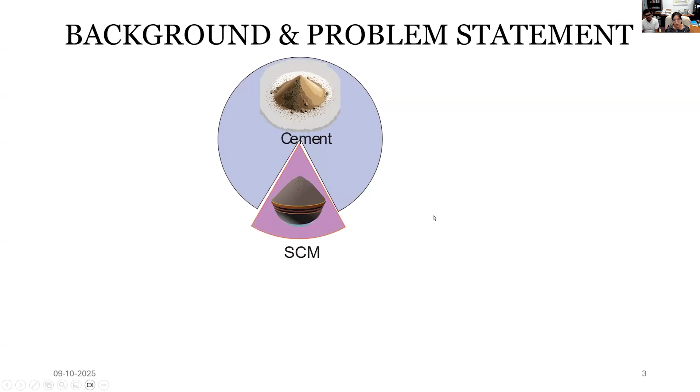So there are a lot of ongoing researches to find out how to minimize the CO2 release from the cement industry. One option can be to reformulate the clinker phases that we use to produce cement. Or we can also use a different type of binder, such as LC3, that has been quite a hot topic recently. But typically, what we do in the cement industry is to partially replace cement with so-called SCM, supplementary cementitious materials. There are several SCMs that are typically used on the job site. Fly ash and slag are the most commonly used.

However, fly ash is a byproduct of coal combustion power plants, and due to the closing of these plants, the fly ash supply now goes down dramatically. Slag, on the other side, is a byproduct of the iron industry, and since we are switching from the blast furnace to the electric furnace, the supply for slag also drops. However, the demand for both materials goes up due to the sustainability issue. So therefore, a lot of people are doing research to seek other options that can be used as SCM.

In recent years, there are a lot of ongoing researches to see how to use agricultural waste as supplementary cementitious materials. Maybe you have heard of research on rice husk ash quite a bit. Rice, for example, belongs to the so-called Poaceae family of the plant kingdom. This type of crop has a high amorphous silica content, which makes it a good candidate to be used as SCM. Typical plants or crops under this family are corn, rice, wheat, bamboo, and sugarcane.

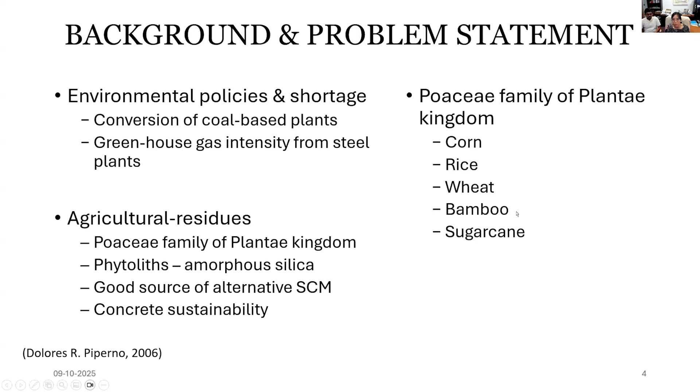So if we take a look at the distribution or production of these crops all over the world, we can find that in India and China, and also Indonesia and some other Asian countries, they have rice husk a lot. They produce rice a lot. That's why rice husk is more available there.

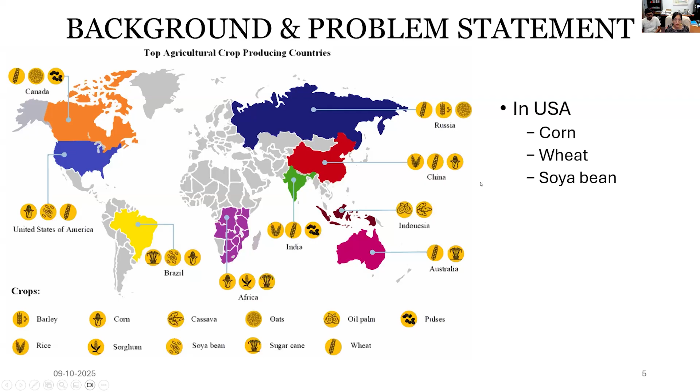However, in the US, what we produce are corn, wheat and soybeans. Those are the top three agricultural crops produced in the US. And here, corn and wheat belong to the family that we mentioned, which has a high content of silica in it. Now in the US, if we take a look at how much corn stover we produce each year, it's over 200 million tons. And for wheat, it's about 45 million tons each year.

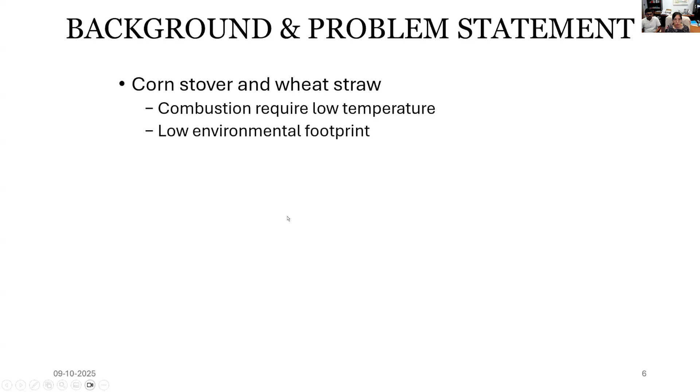If we just think about these two products and combust them to make so-called ash that can be used in cement, even though that will also cost some energy, the temperature that you use to combust corn stover ash and wheat straw ash is way lower than the temperature that you use to make cement. That makes a low environmental footprint for CO2 released to the air.

If we just consume like 50% of the corn stover and or the wheat straw that we produce in the US each year, that can help to cut off 9.5% of cement production, which means 7 million metric tons of CO2 will be reduced compared to traditional cement manufacturing.

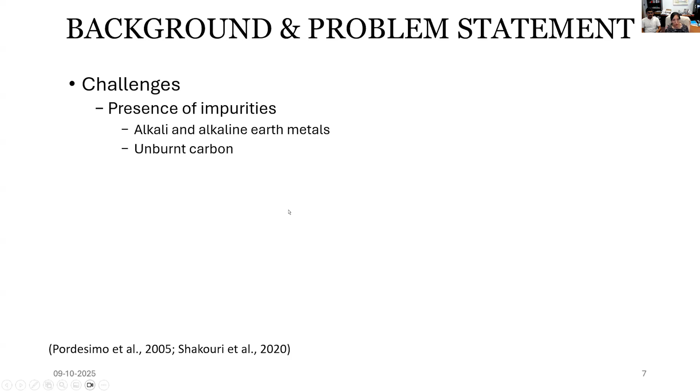However, these agricultural ashes cannot be directly used in cement. This is due to the impurities in these materials. They typically have very high alkali and alkaline earth metals that inhibit hydration of cement. And also there might be a lot of unburned carbon in it that increases the loss on ignition in cement. Therefore, if you want to use these ashes as cementitious materials, most of the time you will need to do so-called pre-treatment.

There are three typical ways that you can pre-treat your material. You can do it chemically, which means we can use acid or basic solutions to remove the impurities. Or you can use thermal treatment, which means you heat your sample to a high temperature so that the impurities are gotten rid of. And you can also grind your samples, which is called mechanochemical reactions. While you're grinding, you generate heat, which also helps to remove the impurities in your material.

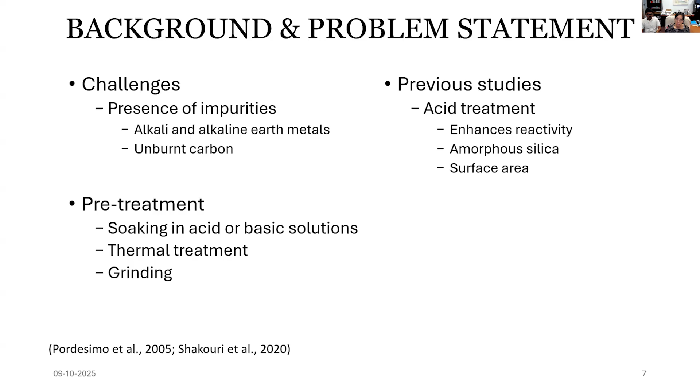So for ash treatment, chemical treatment will be the most feasible way, because researchers found that acid treatment can help to remove the impurities quite efficiently, and it also helps to increase the amorphous silica content in your material.

However, there are a lot of uncertainties in acid treatment. Currently in the US, there's no standard procedure we can follow to treat our agricultural waste using different types of acid. There's nothing that says we need to use a certain concentration, so we need to figure it out. The treatment duration is another question, and the temperature, the concentration of the acid, and the ash to acid ratio. These are all undetermined. Therefore, to decipher this black box of acid treatment, we need to conduct some systematic research.

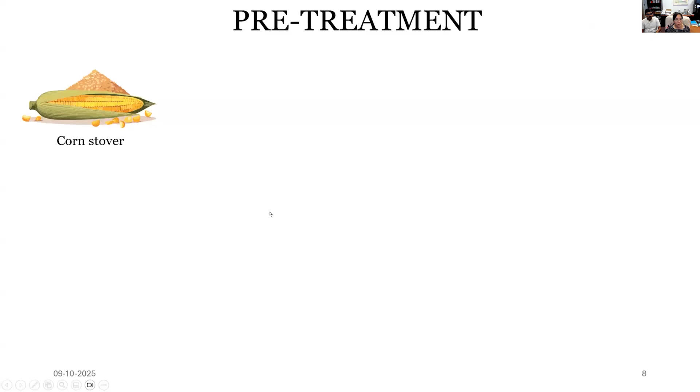So in our group, we nailed down our methodologies. Once we have the corn stover, we initially burn it at a low temperature to make ash. Once we have the ash, we grind it into powders, and we let all of the powders go through number 200 sieves so that they have comparable size to cement. Then we use water wash or acid wash for the material. The water wash we use as a reference, and we study the impurities in the leachates.

For the acid wash, we decided to use 3 different types of acid: HCl, hydrochloric acid, nitric acid, and sulfuric acid. For each acid, we have 3 concentrations: 0.1, 0.5, and 1 mole per liter. And we also have 3 acid to ash ratios, which are 2.5, 5, and 10.

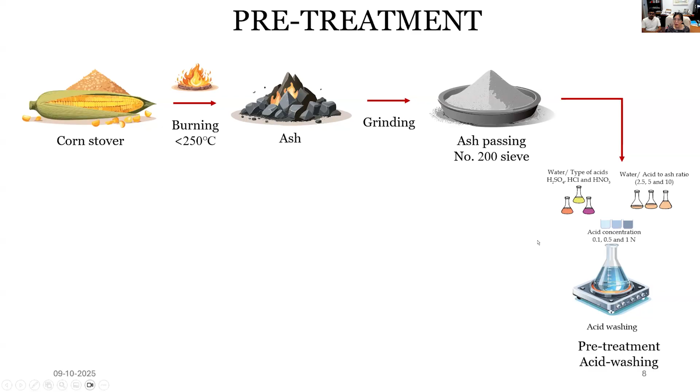After that, we wash the ash and filter it. The solid residual we wash again with water to get rid of the acid residue, then we dry it and calcine the solid. For the liquid, we analyze its composition to see the removal efficiency for the impurities. After we have the calcined ash, we mix it together with cement to look at the hydration.

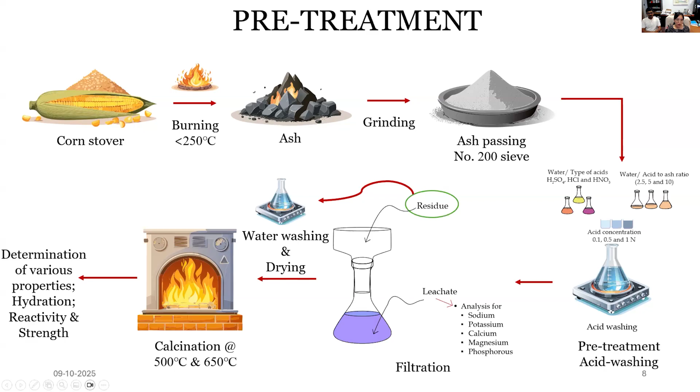So here are the materials that we used in our research. We have type 1L cement. We have fly ash as another reference to compare with the corn stover ash that we developed. And every time when we replace the cement with ash, we always use 20%, which is consistent with the current practice of KYTC.

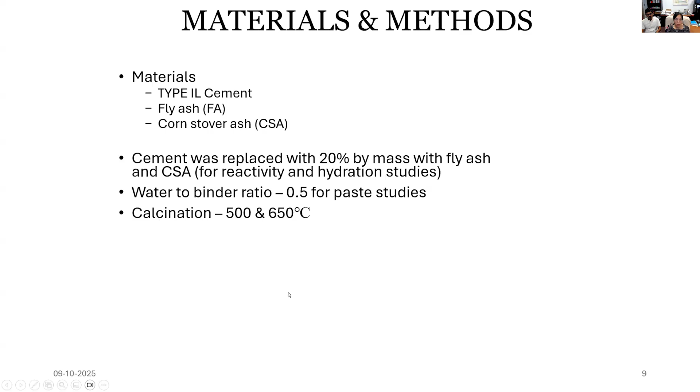And then we used 0.5 for water to binder ratio for all of the paste that we did, and 2 different calcination temperatures. For the material characterizations, we used XRF, and we also test loss on ignition. And we used the ICP-MS method to look at the leachate, and then we will show the results.

And we also use the TGA method to look at the composition in the paste so that we can calculate the CH amount, and then we can use that as an indication of the secondary hydration or pozzolanic reaction in paste. And then we also use the calorimetric method to measure the hydration of the paste directly.

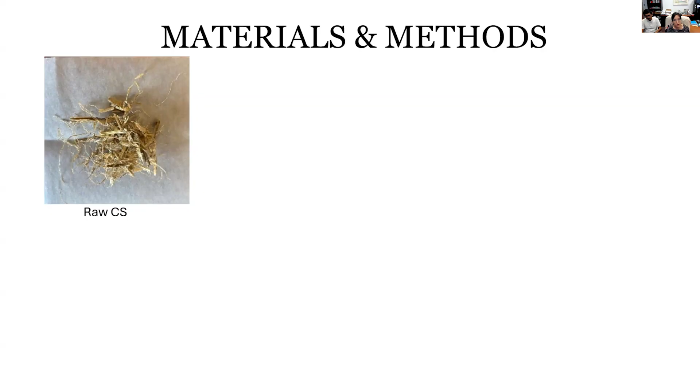So here are some pictures that we took in the process of the experiments. And these are the raw corn stover that we obtained from Idaho National Lab. And then after that, we burn it at low temperature, and you will see those blackish color ash. And then we grind them and we sieve them. So they all pass through number 200 sieves. And those are the fine powders.

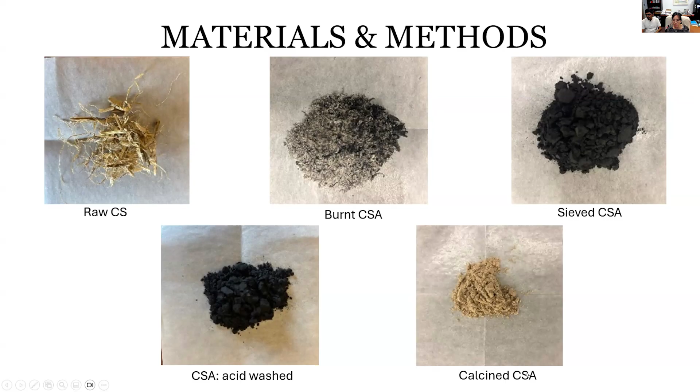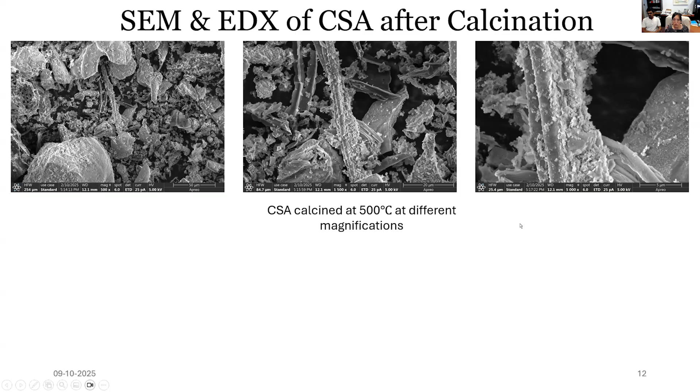So if we take a look at the ash calcined at 500 degrees from just water wash, you can still see the fiber structures of your material. And then if we enlarge, for this picture on your right, you actually see a lot of deposits on the surface of your material. So if we enlarge into that area and also do the EDS, we found that lots of these deposits are actually silica.

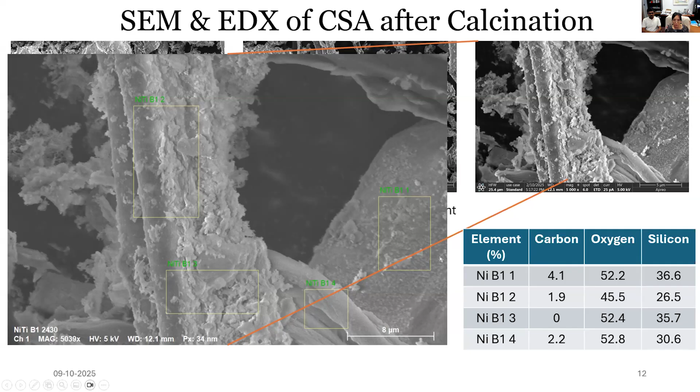Which gave us an important message: these materials actually have a great potential to be used as an SCM if they're treated properly. So from there, we thought after water wash and calcine, we already see silica in it. And so our next goal is to remove the impurities through acid treatment.

So as I mentioned, we have 3 different types of acid. We have 3 different concentrations, and we have 3 different acid to ash ratios. But we want to keep the consistency in all of the procedures that we use for all different types of acid and all these variables. So first thing we need to decide is how long we've got to wash these ashes so that the impurities can be removed effectively.

So we did an initial study. We used HCl as the acid and low concentration there. And we washed our ash for 2 hours, 4 hours, and 6 hours. And after that, we analyzed the composition in the leachate by using this ICP method. So ICP is inductively coupled plasma.

It's a method that helps you identify and quantify the elements in the sample. How it did it is by converting the samples into ions, and then these ions can be separated by mass to charge ratios using a mass spectrometer.

Next, coming to the effect of different types of acid. Here we can see for all the corn stover ashes, we washed the acid corn stover ash with hydrochloric acid, sulfuric acid, and nitric acid at 1 normality at similar acid to ash ratio. So here we can understand that acid becomes very selective in removing particular impurities from the system.

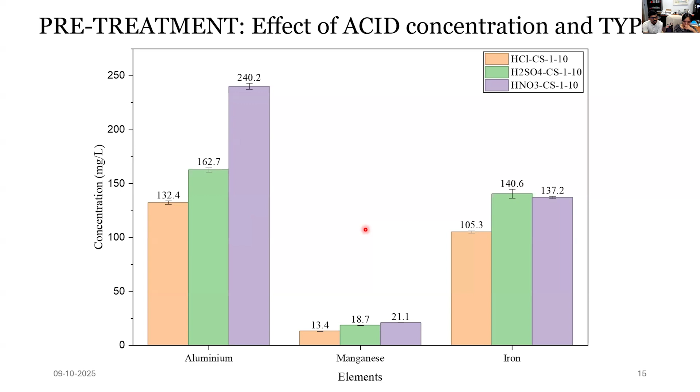So based on this, we used the treated material, calcined this material, and substituted it with cement to try to understand how the different treatments affect the reactivity and the hydration. In the next slide, I will be speaking about the effect of replacement of this treated material on the hydration. For the hydration method, we used isothermal calorimetry to measure the heat release from the system.

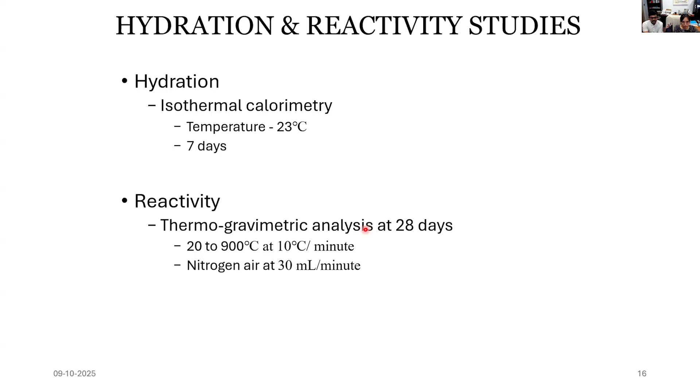This particular experiment was conducted for 7 days at a constant temperature of 23 degrees centigrade. To understand the reactivity, we used thermogravimetric analysis, and these samples, the cement and the 20% replaced corn stover ash samples, were cast and kept for 28 days, and the following method was used to understand the presence of CH in the system, calcium hydroxide.

Coming to the hydration studies, in this slide we will see how the effect of calcination affects the heat release from the cement. We can understand that with respect to OPC, when we replace cement with 20% fly ash, obviously fly ash reactivity is a bit slower, and it also dilutes the system, which leads to a reduction in the heat flow.

And when we replace cement with corn stover ash calcined at 500 degrees centigrade, we could see that the presence of impurity is not released, not taken out completely, which leads to a higher dormant period compared to the fly ash, and also a reduction in the heat flow. However, when we replace the cement with corn stover ash calcined at 650 degrees centigrade without any pre-treatment, we could see a very huge increase in the heat flow, which shows that the reactivity is boosting high, and the dormant period gets reduced.

Coming to the next point, this could be because of two reasons. One is the corn stover ash, which is calcined at 500 degrees centigrade, had a higher amount of unburned carbon in the system, almost 5.4%. When we calcine it to 650 degrees centigrade, the unburned carbon reduced to 1.8%, which correspondingly increases the reactive silica and alumina in the system.

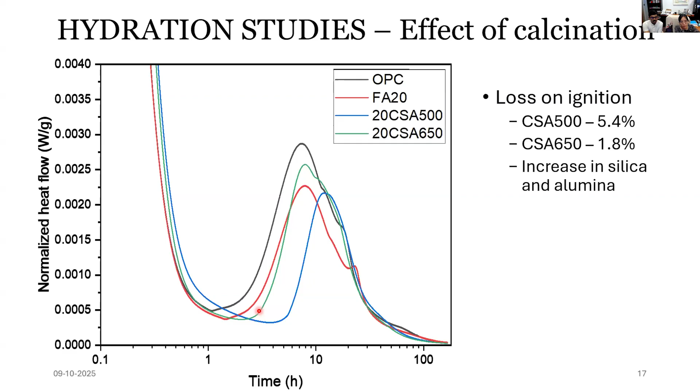When it comes to using the calcined ashes at 650 degrees centigrade, we could see that the pattern is almost similar when treated with different kinds of acids like hydrochloric acid, sulfuric acid, and nitric acid.

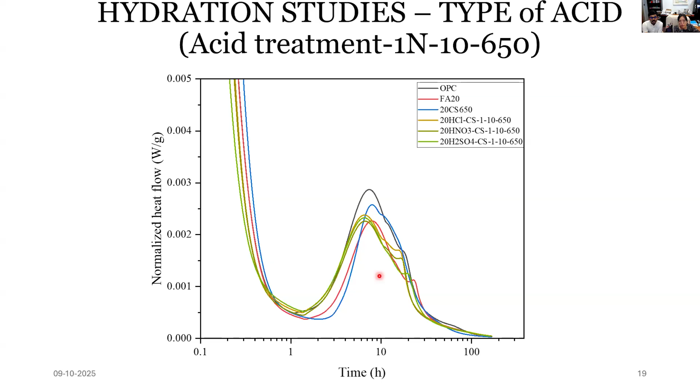Then we went on to understand the reactivity of these different systems. For that, we used thermogravimetric analysis as mentioned earlier. In this method, we try to quantify the amount of calcium hydroxide in the system. The calcium hydroxide is formed during the primary reaction between cement and water, which leads to formation of the primary binding product called calcium silicate hydrate, along with calcium hydroxide.

When we start substituting the cement with supplementary cementitious material like fly ash or the treated ashes, based on the amount of silica in the system, it can react with this formed calcium hydroxide and turn it into secondary CSH. So measuring the amount of CH in the system can be indirectly used to know the reactivity, or the CH balance, in the system, which tells us about the reactivity of the system. Lower the calcium hydroxide in the system, the higher the reactivity.

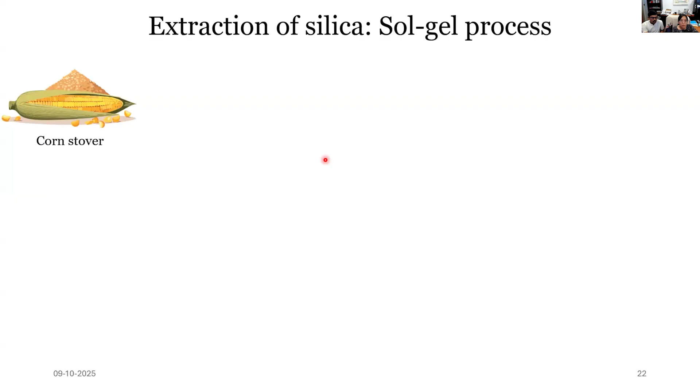Other than this, we actually extracted the purest form of silica from the agro residue. For that, using the pre-treatment method shown earlier, we burnt the corn stover under 250 degrees centigrade, ground the ash obtained, and passed it through number 200 sieve. Then we used 0.1 normality hydrochloric acid, which gave the best reactivity in terms of CH consumption.

And after washing it, the residue what we obtained, we water washed and dried it and calcined at 650 degrees centigrade. And then this material, what we prepared from the hydrochloric acid treatment, we used the sol gel method to separate out the purest silica from the system.

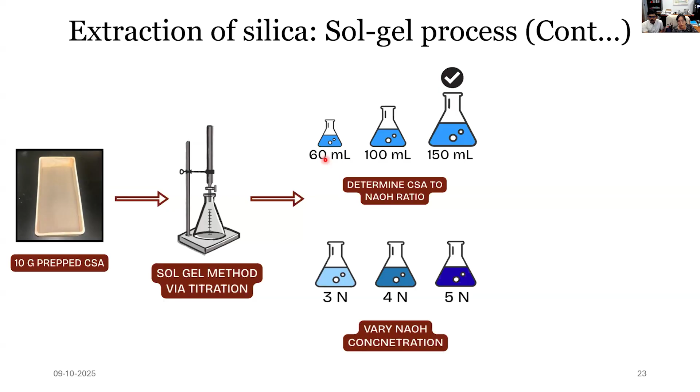And we used two different types of process parameters to optimize it. One is we varied the CSA to sodium hydroxide volume from 60 ml to 150 ml. And then the normality of the sodium hydroxide also varied from 3 normality to 5 normality to identify which could be the optimum value to synthesize this amorphous silica from the system.

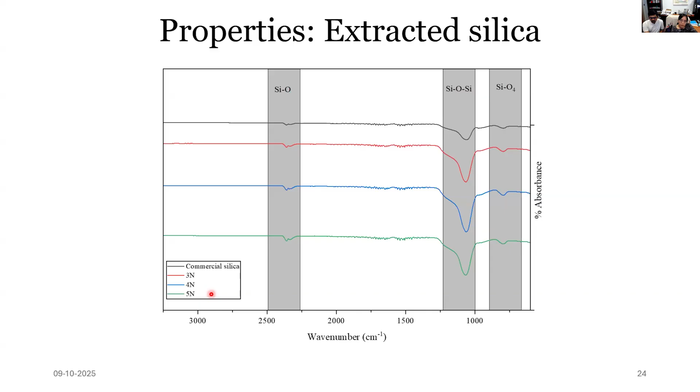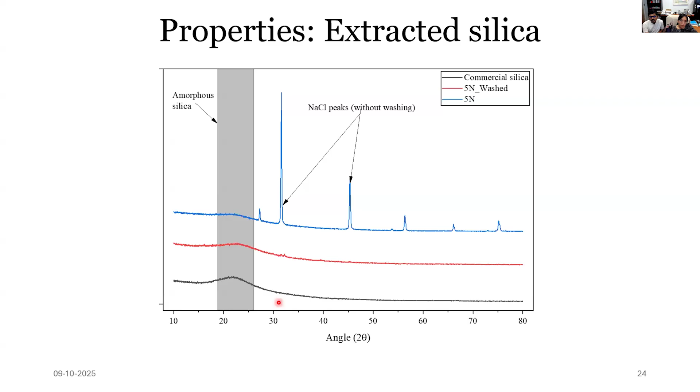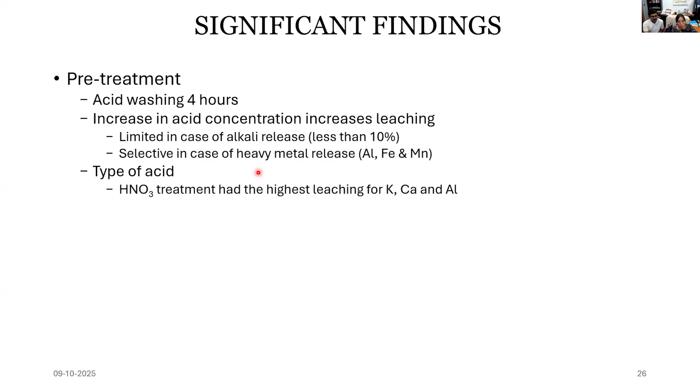And coming to the hydration reactivity studies, we could understand that calcination obviously improves the reactivity by reducing the loss on ignition of the system and increasing the amorphous silica and alumina in the system.

And when it comes to specific type of acid treatment, if we are going to pre-treat the ash with sulfuric acid, we need to be very conscious because treatment with sulfuric acid leads to a higher amount of sulfate in the corn stover ash what we have. That might result in formation of ettringite at a later stage, which we can observe from the hydration peaks. This might lead to some kind of hardened related property problems in the later stages.

And when it comes to TGA reactivity results, we could clearly see that if we have an acid which has a good efficiency in removing the impurities from the system, that doesn't mean it has the highest reactivity. So to understand this in a better way, we are doing further material property related characterization research to understand how this affects the reactivity.

And coming to the results, the significant findings on the extracted silica: we could use a very simplified method to extract pure amorphous silica from the system by the sol-gel process. Especially, if we increase the concentration of the sodium hydroxide, then the yield of the silica which we are extracting from the agro residue increases.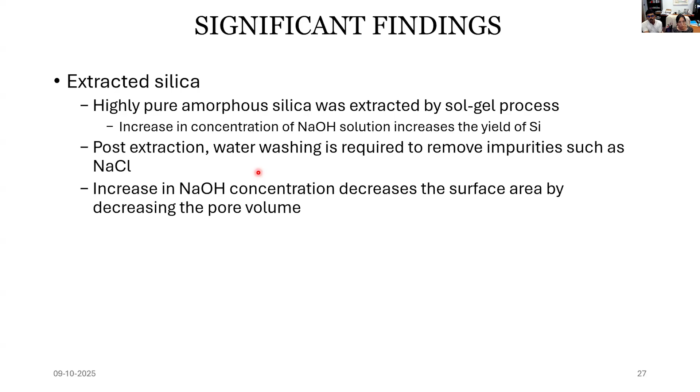To have a more comprehensive understanding about how different characteristics and properties affect the reactivity and hydration, we are actually in the process of conducting and evaluating different characteristics of the material what we have obtained by the acid washing. And also fresh and hardened property studies are being carried out to relate it with the reactivity of the system.

And as we know, we say that these agro residues can be used as a supplementary cementitious material. However, we need to do some kind of pre-treatments and calcination to make them more appropriate or reactive when we are using them as a substitute. So in order to know whether it is economical and not degrading the environment, we are doing a life cycle analysis on this material to evaluate the optimum pre-treatment process and calcination condition we can give to the material.

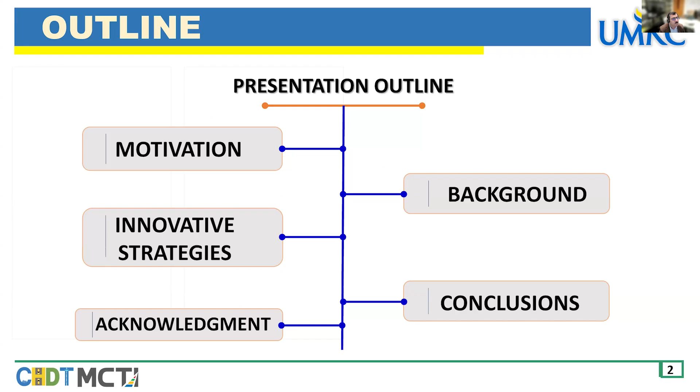My presentation is titled Embracing Innovative Strategies for Sustainable and Resilient Bridges. The presentation outline includes the motivation, the background, innovative strategies, conclusions, and finally the acknowledgement. So I'm going to start by defining these two important terms, but in a different way. Sustainability ensures long-term function through infrastructure rehabilitation, and resilience enables the system to adapt and recover.

Now, the question is, how do sustainability and resilience complement each other in ensuring the long-term functionality and adaptability of an infrastructure system? So there is a huge challenge so far. According to the U.S. Bridge Conditions 2024, from the Federal Highway Administration, between the years 20 and 24 there is almost a 4% increase in the number of bridges in fair condition. And the good condition has decreased.

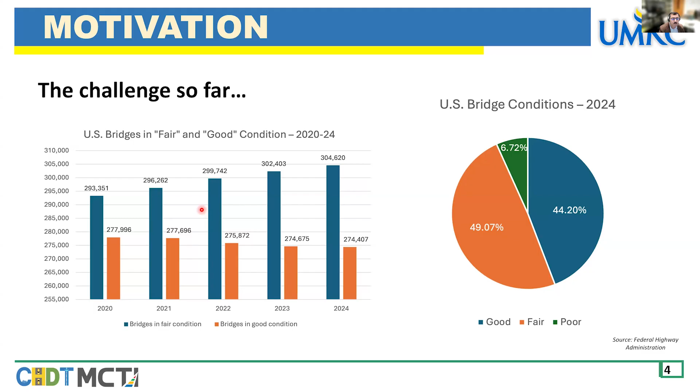And as we can see here, if we add up the fair and the poor condition, it's almost 56% of the total number of bridges, which is almost 622,000 bridges in the whole nation. So this is something really alarming. And we're still with the challenge so far.

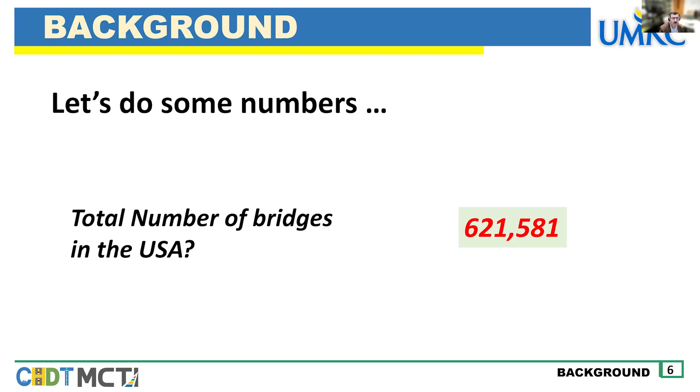So let's do some numbers here. The total number of bridges in the United States is almost 622,000. These bridges can be classified in these 3 categories: steel bridges 33%, conventional reinforced concrete bridges 42%, and prestressed concrete 25%. So mainly it's steel and concrete here.

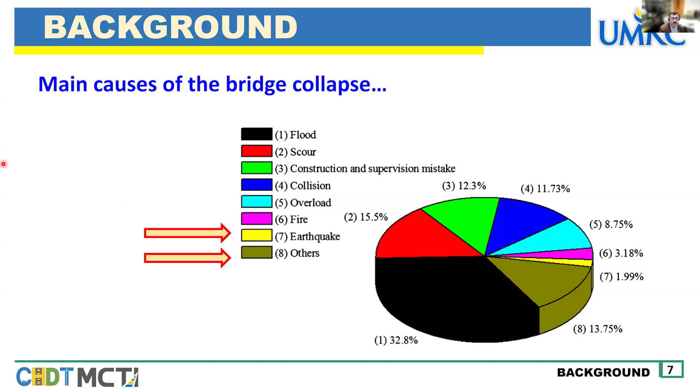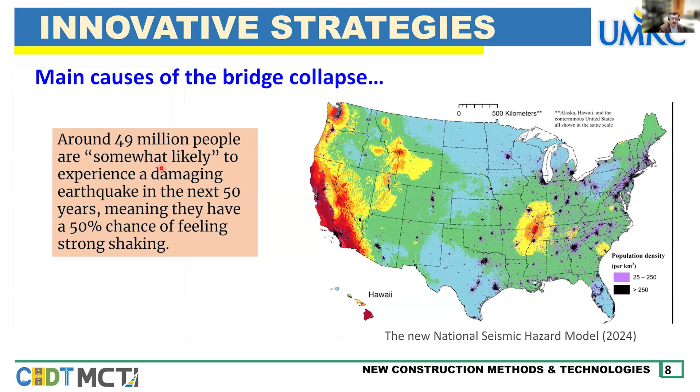Now, the main causes of bridge collapse, as we can see, is a huge list, starting with flooding and ending with earthquake. We are going to focus today on two things here: the earthquake and, among the others, mainly corrosion for the steel bridges. As we can see, the National Seismic Hazard Model 2024 estimated that around 49 million people are likely to experience a damaging earthquake in the next 50 years. So the question is how to mitigate earthquake damage for our modern infrastructure systems and also the bridge elements.

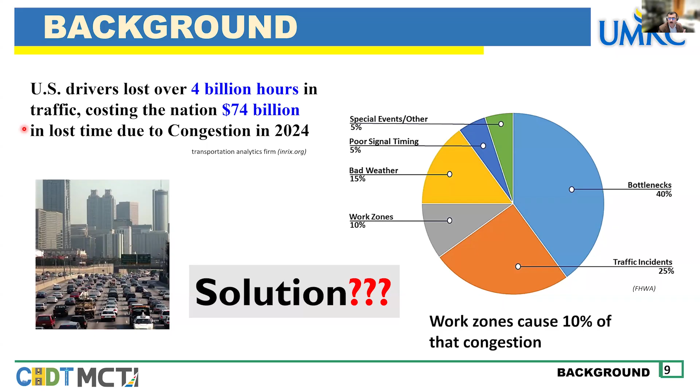So as we can see here, there is the seismic hazard and also the congestion. So we need to ask ourselves, what's the solution here? What's required to surmount these significant challenges? What we need, honestly, is innovation. Innovation in what? In new construction methods and technologies, advanced materials for rehabilitation, and finally, evaluation techniques. So let's start with the new construction methods and technologies.

So ABC, accelerated bridge construction, relies mainly on prefabricated bridge elements and systems. One of the indispensable elements in this assembly is the columns, and ABC represents a paradigm shift in bridge construction for today's infrastructure and modern nationwide systems.

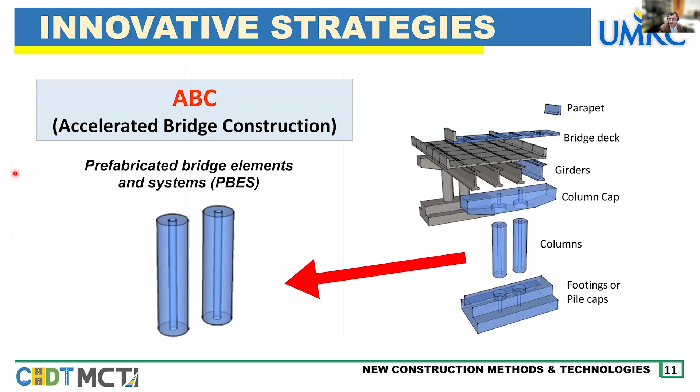So what's the advantage of ABC, accelerated bridge construction? First of all, site constructability, reducing the total project delivery time, work zone safety by reducing the exposure of workers in hazard zones, and the traffic impact, and also the on-site construction time, which is related to the total project time, and the weather-related time. It's going to decrease the traffic impact, the on-site construction time, the weather-related time, and mainly increase the safety in the work zone.

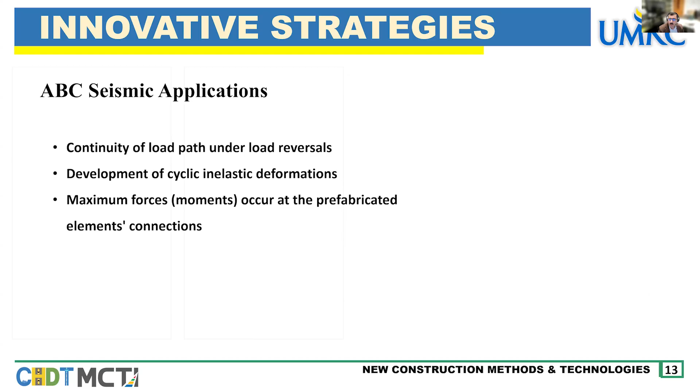For ABC seismic applications, we want from accelerated bridge construction the continuity of the load path under load reversals. In seismic events, with development of cyclic inelastic deformations, maximum forces and moments occur at the prefabricated member connections. This is very important. So the connections, either with the bent, which is the pocket connection, or with the footing, the socket connection, and certain element material behaviors may cause rapid loss of the cyclic resistance, due to local buckling and strain concentration.

So in general, we need to reduce the seismic mass, make efficient use of materials, and improve the strength-to-mass and stiffness-to-mass ratio. I think we are asking too much here. Can we achieve all these aspects? So let's see. We propose the hollow core column.

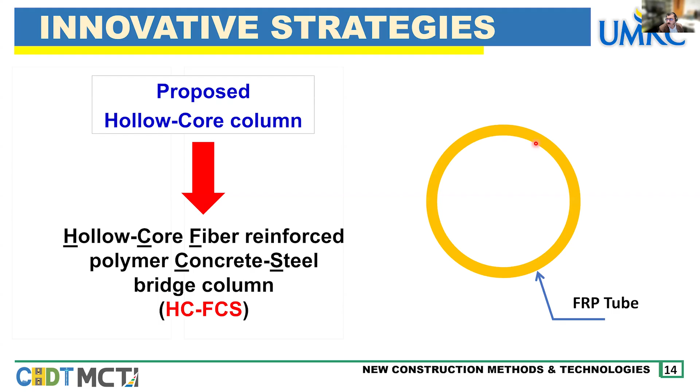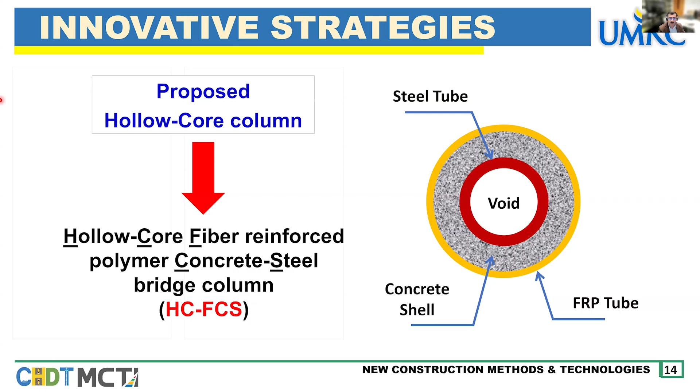It's an innovative column, the hollow core fiber reinforced polymer concrete steel bridge column. It consists of the FRP tube outside, the hollow steel tube inside, and the concrete sandwiched between them. There is no reinforcement, just the concrete, acting like a spring between the steel tube inside and the FRP tube outside. What are the advantages of this kind of novel column?

60 to 75% less concrete material and lower freight cost. The FRP tube acts as stay-in-place formwork, as we can see here, with the steel column and the concrete placed between them, and we use self-consolidating concrete, SCC. The steel tube acts as flexural and shear reinforcement, as you can see here. And finally, high corrosion resistance due to the FRP tube outside.

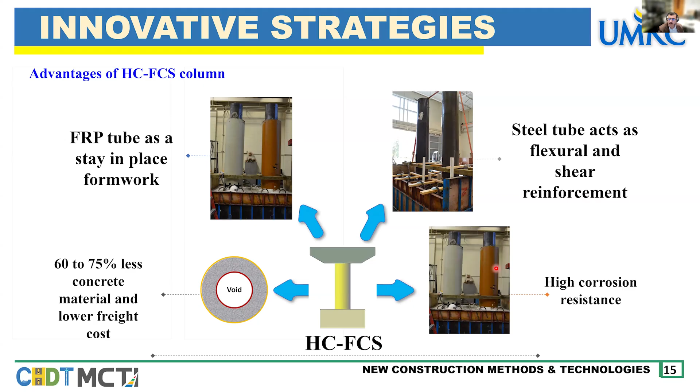The construction method of the hollow core fiber concrete steel column consists of cast-in-place elements, as we have seen in the previous picture, or it's going to be a prefabricated, precast element, consisting of the footing with the hole, and then just bring the column inside, as we can see here, and then do the injection of high strength grout around the embedded steel tube inside the footing.

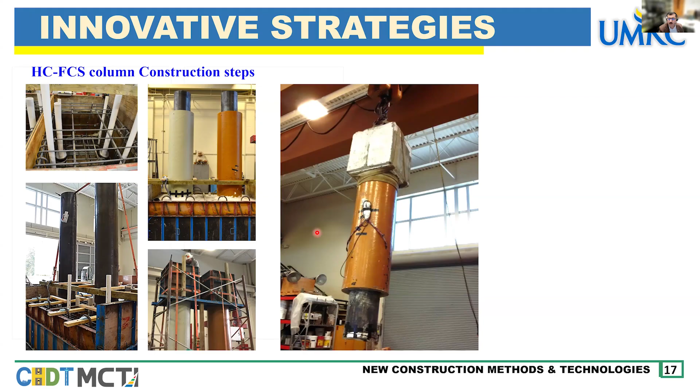And here is a picture from the construction of the larger scale hollow core fiber concrete steel column. This is the caging for the footing, and this is placing the steel tube inside the footing, and then the FRP tube outside, we have two types of glass fiber tubes, and then constructing the head, mimicking the bent of the column. After this, lifting the column, with the embedded steel tube portion going into the footing. We make some adjustment inside the footing, do the high strength grout, and the column, as we can see here, is ready to be tested as a large scale column.

So in high seismic areas, inelastic ductility is required. This is the ductile design, which is applied with the displacement based method. This is different from the traditional design, which uses the AASHTO coefficient method. In general, I need the capacity higher than the demand. This is the main concept.

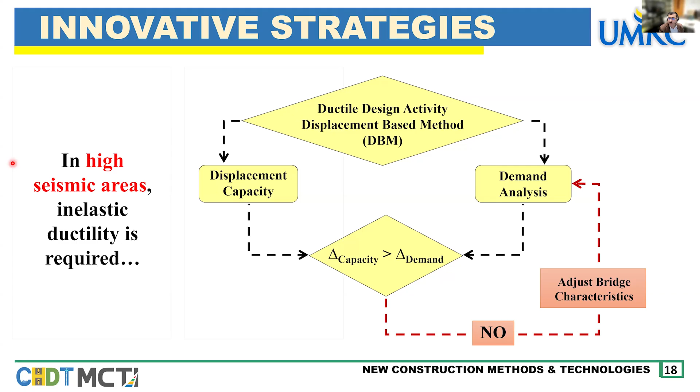So now let's do the experimental test on this novel column. As we can see here, we implemented FEMA 461/2007, the quasi-static displacement controlled cyclic loading with a constant axial load of 110 kips, corresponding to 5% of the axial load capacity, and it includes 2 cycles for each displacement amplitude, as you can see here.

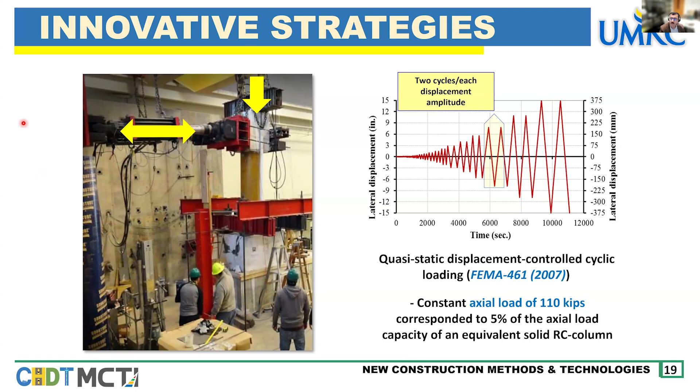These are some videos from the actual test, and as you can see here, this is the hollow core column under the lateral quasi-static and also the axial load, and this is the steel tube from inside. And we need to achieve this inelastic deformation. Typically for a reinforced concrete column, this is the conventional one, you will see the concrete falling off in the plastic hinge region, and then the steel reinforcement buckling, at between 5 to 7 percent drift ratios.

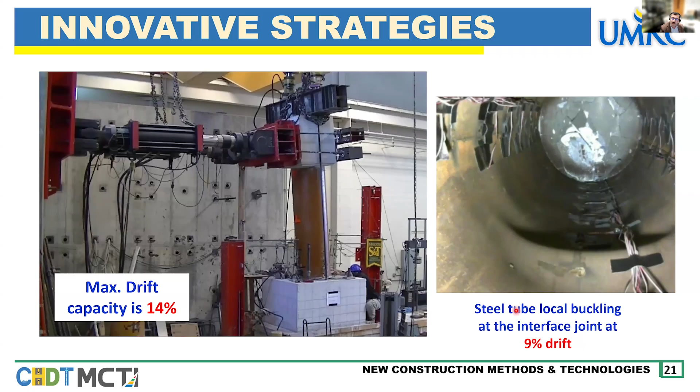But with this novel column, we reached up to 14% drift capacity, which is really remarkable. And the buckling of the steel tube, this is the localized buckling of the steel tube at the joint here, the interface between the column and the footing connection. This started at 9% drift, which is really remarkable.

Overall, very promising results. In terms of the strength capacity, as you can see, this is for the conventional column, and we reached twice the required strength. This is for the moment, up to 900 kip-ft. And for the drift capacity, twice the required lateral drift capacity. We put the target here of 6, even though there are no specific guidelines, but this was the target based on the tested conventional reinforced concrete column. We reached up to 14 here.

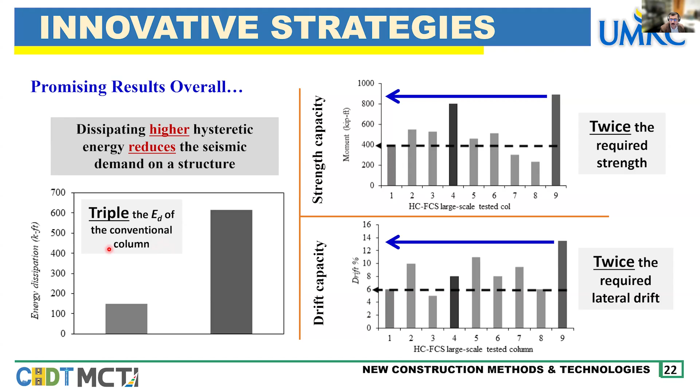And for the energy dissipation, which is a very important key factor, dissipating higher hysteretic energy reduces the seismic demand on the structure. For this novel column, we reached triple the energy dissipated compared to the conventional column. In general, we need a novel column that is easy to construct in terms of modern infrastructure systems, and also post-damage, it's not difficult to repair and retrofit after an extreme event.

Now, the question: can I overcome these two damages here? The first one, if the damage is in the column itself, we will see the rupture of the FRP on the compression side, under the cycles of tension and compression, and also the steel tube buckling. But for the early stages with the FRP rupture, we developed a rapid recovery system here. So we were able to repair and retrofit this column within just 6 hours.

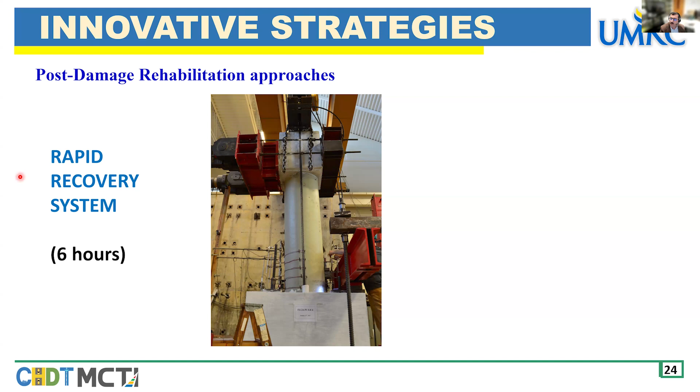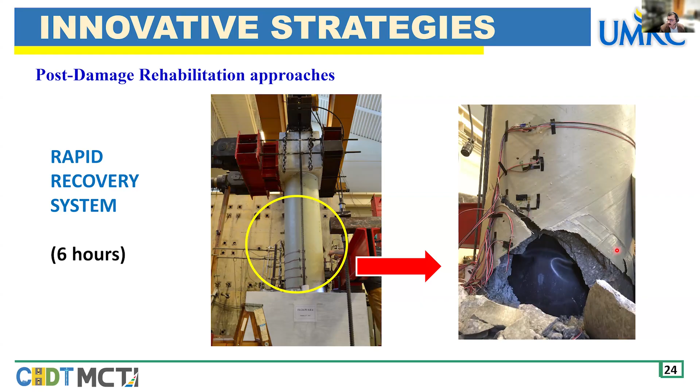And this is the damage, as we can see here, severe damage, especially in the FRP, and there's a huge loss in the confined concrete, which is here between the FRP and the steel tube. So what's the proposed rapid recovery system here? From this shape with the huge damage to this column, ready to be tested again under the same loading conditions.

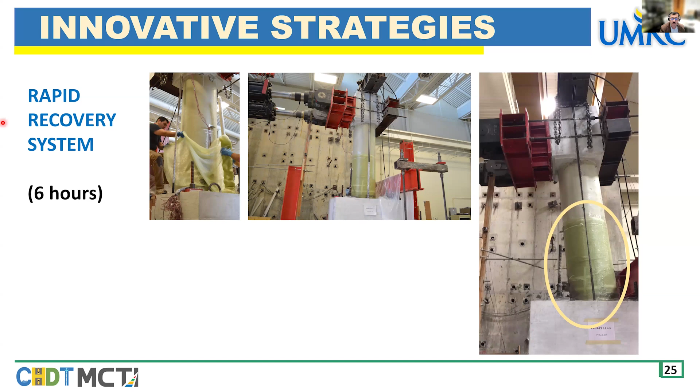First of all, we started with the wet layup fabric FRP, and here we used the high strength glass fiber fabric saturated with epoxy resin, and we took this as a blanket and wrapped the column in this region after cleaning and taking off all the loose concrete. And as you can see, we just tied the FRP from the top and left it to settle for an hour.

And then we put this sonotube tube as kind of a heat chamber. And we applied the heat gun here to speed up the process of the curing of the FRP with the epoxy resin. Then we did this hole for the injection, and we use this one to inject the high strength concrete inside to just compensate the loss in the concrete in this region.

And this is the column, as you can see, it's ready to be tested. And this process was within just 6 hours. So this is the first one, and we were successfully able to retrofit the column.

So the system showed us a huge performance after the experimental test under the quasi-static cyclic loading, and also the system shows us it's easy to repair in a very effective way and with a short time. Definitely, we want to cut the time, we want to cut the cost of the repair, but always maintain the high quality, the strength of the whole system.

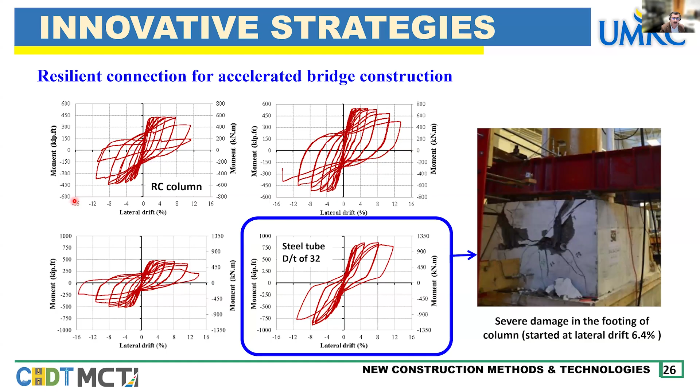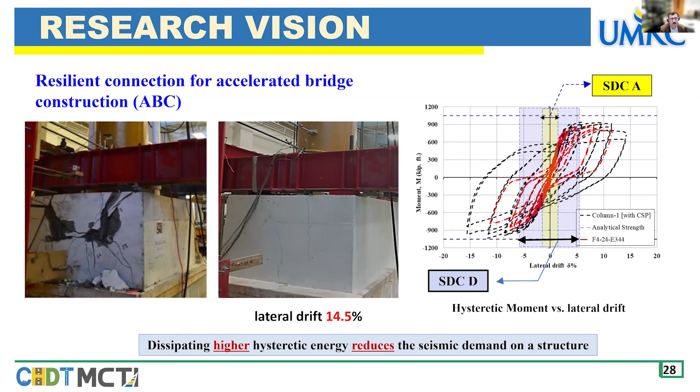Now, still in the rehabilitation mode here and using the new technologies, now we are going to talk more about using advanced materials to improve and increase the lifespan of our infrastructure.

So the total number of bridges in our state, Missouri state, is 24,600. 700 plus of them are steel bridges. And 300 of these bridges have pile section loss due to harsh environmental effects. So Missouri state has the 7th largest number of bridges nationwide, 52% of these bridges are older than their intended useful life of 50 years. 9% of bridges are structurally deficient, and we are still with the grade C.

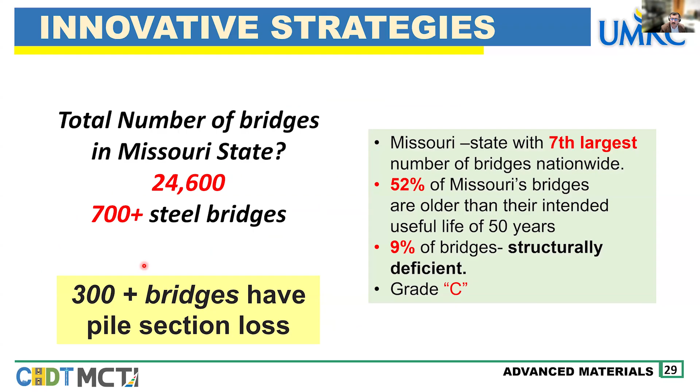Now, for the steel bridges with the steel H piles as columns, according to the Eurocode, the recommended value for loss of thickness in millimeters due to corrosion of piles and sheet piles in freshwater and seawater is specified in the section.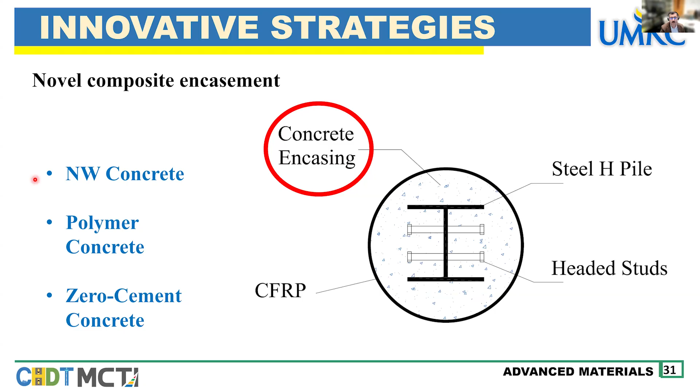This is definitely implemented with advanced materials. So the novel composite encasement includes concrete encasement confined by CFRP, the carbon fiber reinforced polymer, and also using headed studs inside as a mechanical interlock. These are all combined into the encasement for the damaged or severely corroded steel H pile. The concrete encasing can either be normal weight concrete, polymer concrete, or zero cement concrete, the geopolymer concrete. All of these types of concrete have been used in proposing this novel composite encasement for the repair of the damaged H pile.

As you can see, this is like a band-aid for the corroded, damaged steel H pile. We tested this in a huge matrix, testing several steel H piles with different corrosion severity. This is back when I was at S&T.

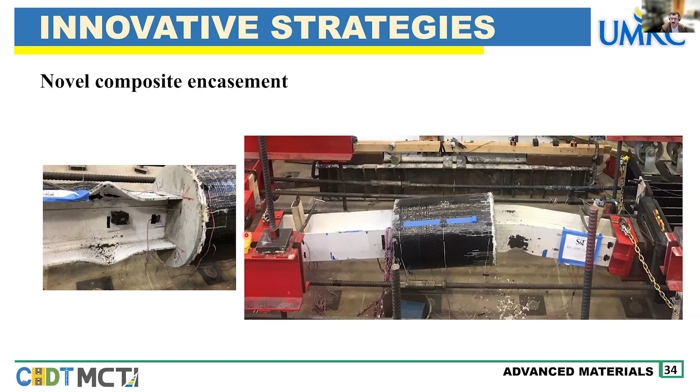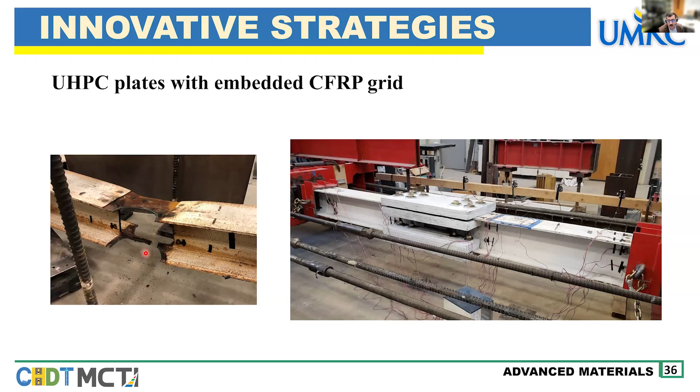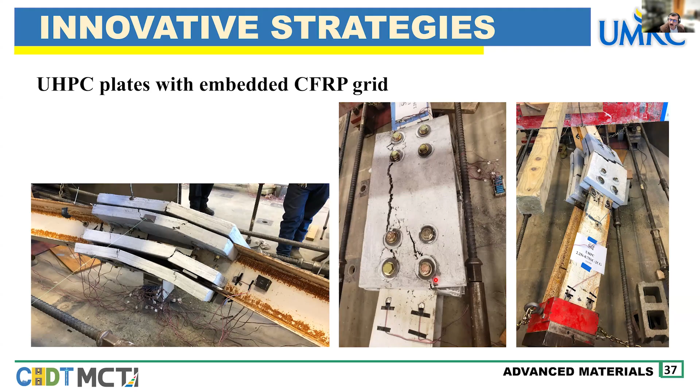And this is the H pile. We tested the H pile under axial compression, just from the top and the bottom, with the self-sustained testing system here. This is the steel H pile after the retrofit repair using the panel.

In general, using the UHPC plates, we were able to improve the capacity. This is the unrepaired one, this is the corroded one, and with the repaired one we reached up to 3 times the capacity of the unrepaired steel H pile.

So we're using the ultra high performance concrete plates. Now with the composite material, the jacketing system using the CFRP and also the concrete infill, the target - by the way, the squash load for the healthy section without any corrosion is 600.

With the repair, even using the composite encasement for the corroded damaged column, with CFRP and concrete infill and also the headed stud as a mechanical interlock, we were able to reach up to 700 - more than the load of the healthy section without any corrosion.

This is the advantage of using advanced material in the whole retrofit method. Now, for the real world, here we have localized measurements, and now we are moving to the evaluation techniques.

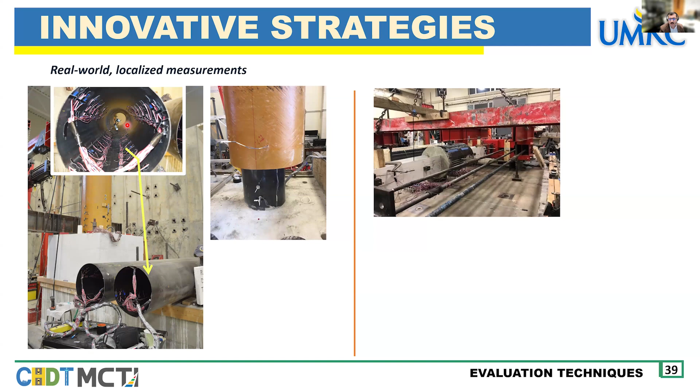As you can see, this is the column before the test, and this is the steel tube. If we look closely at the steel tube here inside, all these strain gauges have been mounted inside the steel tube. I took almost a week crawling inside the steel tube to attach all these strain gauges, and there is also a high definition camera inside to capture the localized buckling at the interface joint.

We also use embedded strain gauges for the concrete shell between the FRP tube and the steel tube, to measure the strains in the concrete under the tension and compression cycle.

For the steel H piles, we use strain gauges on the outer side of the CFRP jacketing, the CFRP tube, and also many strain gauges mounted on the steel tube inside this repair encasement. There is also a strain gauge very close to some locations of the headed studs.

The reason I'm explaining all this real world localized measurement - why is there a reason for this? We're still in the localized measurement stage. As you can see, it's time consuming and, let's say, also expensive.

We put a lot of these strain gauges to overcome the loss of strain gauges while performing the test at some stages, like the early stages of the lateral drift and also the final stages of the lateral drift. Definitely we're going to lose some of the strain gauges, and we're also going to remove some of the LVDTs due to the huge lateral drift.

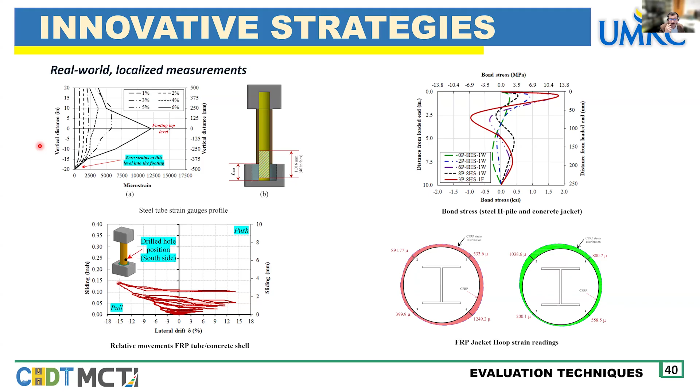This model we are going to use as a platform to expand our research scopes, definitely beyond the experimental test. The goal is to achieve a comprehensive predictive simulation of the entire structure, moving from localized locations to the whole entire structure using multi-physics advanced software. This is the main goal for the long term and the future, because providing a monitoring system is very important, fast and easy to deploy with continuous data reporting.

This is from the experimental data capabilities, which will give us alarms, and no line of sight is required. This establishes a structural health monitoring system integrated with finite element analysis software, leading to models with high complexity, and maybe a surrogate model-based method relying on the experimental measurements, the localized ones.

This is for the H pile, with readings on the CFRP tube and the corroded steel section, severely corroded, and also the concrete infill, or the hollow core fiber concrete steel column. On the FRP tube, as we can see here, this is the rupture of the FRP from outside, this is the footing with the hole, this is the corrugated steel tube, and this is the concrete between the corrugated steel tube and the steel tube from inside.

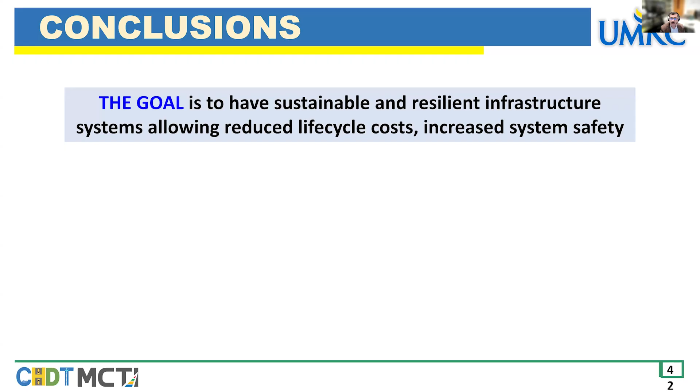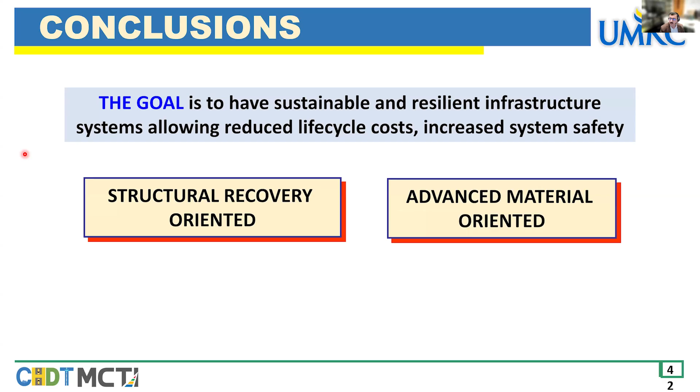So in conclusion, I would like to say we need to think differently, shifting from conventional practices to smarter, more sustainable bridge engineering. This relies on more structural recovery oriented design and different construction techniques for modern infrastructure systems, using advanced materials, and finally structural health monitoring implementing the finite element method.

We must rethink how to design and rehabilitate bridges. Traditional methods fall short of modern needs of resilience and sustainability. Implementing these novel construction techniques and advanced materials, we can create adaptable, efficient, and longer lasting structural bridge elements.

I included some references if you want to learn more about these experimental tests, from recent published articles this year, 2025, and also the technical report with the Department of Transportation.

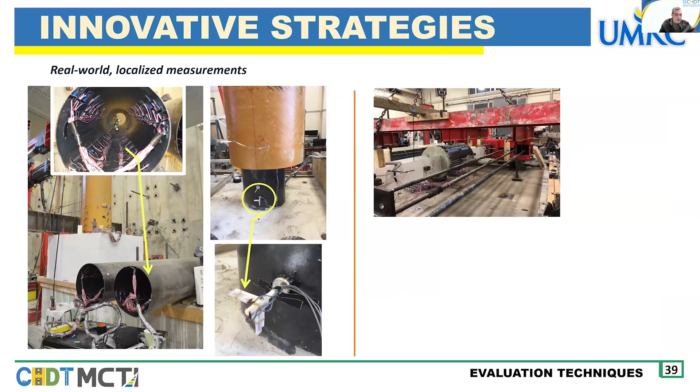I had one question about the H piles. So for the corroded H piles that you're putting the jacket around to strengthen the corroded section, are you using any kind of corrosion measures in the new concrete? Even though it is structurally strengthening that section, I would be worried about the steel that is inside the concrete and the steel that's outside, so at that intersection there may be later onset corrosion because of the high pH versus low pH environment difference for the same steel.

Well, very interesting question, Dr. Holman. We are thinking about our repair method, our technique, as a kind of emergency repair technique. We have a section, an indispensable element, a column, and the whole bridge, and we need to put it back to be functional, with high strength, supporting the whole system.

So definitely, for the long-term durability and considering all these aspects that you mentioned, we didn't consider this one because we are really looking, I don't want to say the short term, but we are really looking just to repair the column and definitely increase the effective stiffness of the lost section.

By the way, even in our repair technique, we considered the worst scenario. There is a gap, just like a void, air. There is not even any use of the remaining steel. But back to your question, no, we didn't do any measure of this one. It's a very good idea to put it for the future works. Thank you for this one.

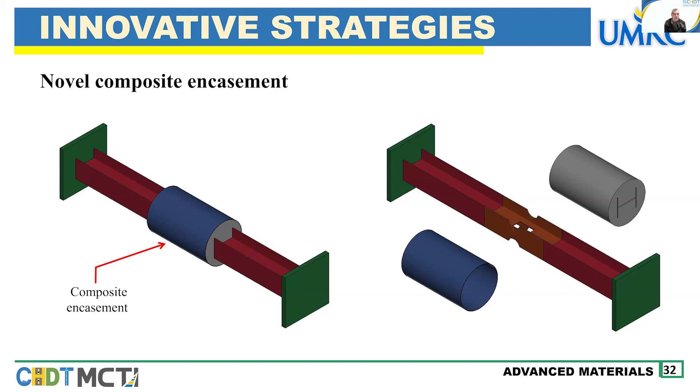And then one more question I had was about the repair in the first one, in the hybrid column that you had the FRP tube on the outside and steel tube in the inside. So you put new FRP, you cure it, and then there's a hole that I see at the bottom. That's where you inject the new concrete, right? Is that a concrete or mortar section that you're pushing through that hole?

It's a mortar, high strength mortar. It's high strength mortar you're putting. Yep. Okay. And the original column, was that mortar as well, or was that concrete? No, it was the self-consolidating, the SCC concrete. Okay, so it was SCC concrete, but then when you're repairing, you're just pushing high strength grout or mortar. Yeah, you're right. Nice, okay.

Okay, very interesting. Then the corrugated pipe that you put into your foundation, that is not galvanized, right? Well, there are two types. One of them, the galvanized one, as you can see, and some of the other colleagues recommended to use not the galvanized one, but this one was the available at that time. Most of these projects were when I was a PhD and also a postdoc. So that one was the available in the local market with this diameter, which is the 36 inches.